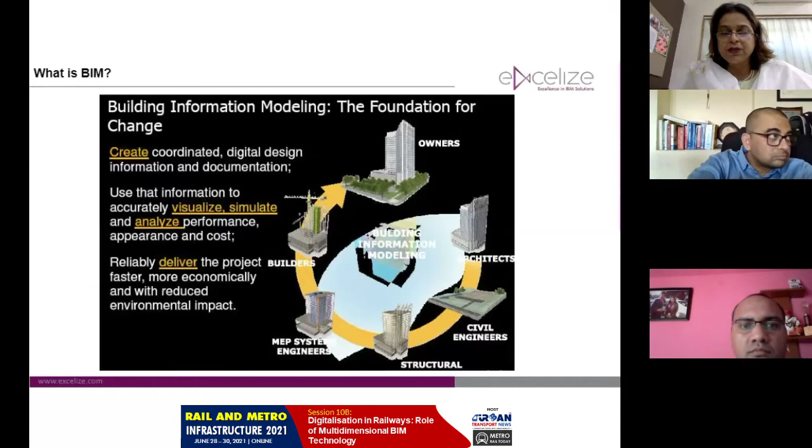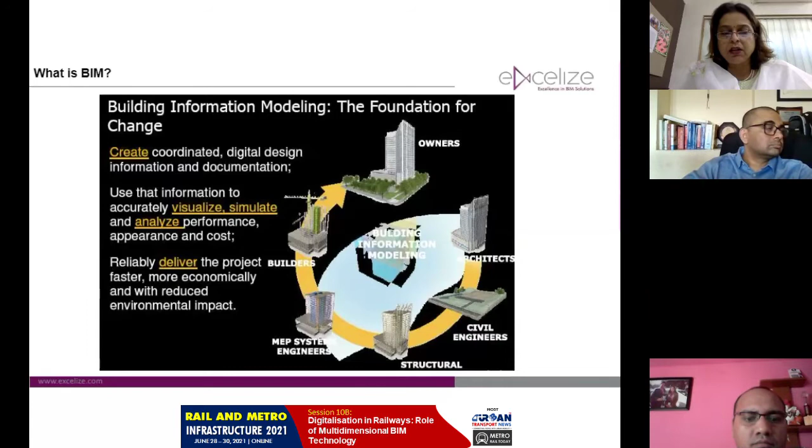So essentially, what is BIM? BIM is not a tool. It's actually a process. It's a process that lets us build virtually before we can build physically. It's a process where all of the consultants and the contractors are all looking at one single source of truth. And this lets us visualize better, it lets us analyze what we are going to build and just have a better product when we actually have the physical structure built.

There are different dimensions in BIM, starting with 2D up to 8D. Very briefly, I'm going to talk about the dimensions of BIM. 3D, everybody's familiar. When we have the height component, we can see a three-dimensional replica of a two-dimensional drawing. The fourth dimension is time. So essentially, when we link our project plan, MSP project plan or a P6 project plan, to our model, we can simulate how the construction is going to happen. And that's essentially the fourth dimension.

Fifth dimension is cost. For every project, every construction activity, there is a cost involved. Being able to connect our ERP systems to the model, to our project plan, and getting real-time information of what money has been spent, what is our cost to completion, all that information is what the fifth dimension of BIM talks about.

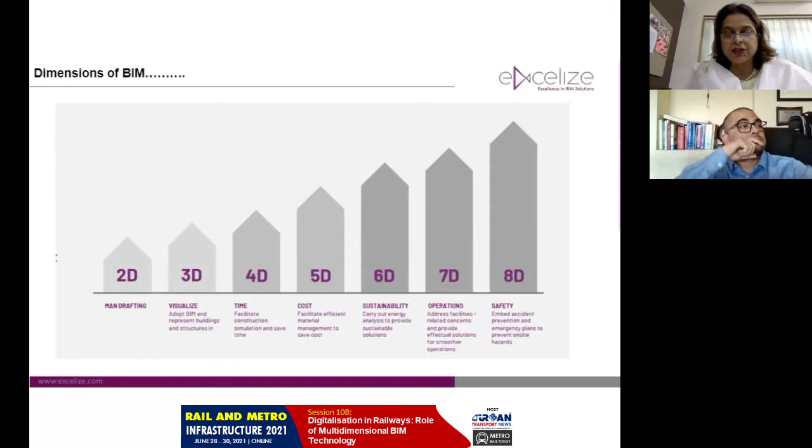Sixth dimension is sustainability. So we can do energy analysis, we can do heat load analysis, do better planning of where we want to keep our openings and structures. That's in terms of the heat. We can also do better calculation of how our carbon footprint is in a building based on the materials that we are choosing.

7D is the operations and maintenance. So actually, if we think about it, construction of any project is a very small part of the entire life cycle. And 7D is where we actually want to focus so we can better manage our buildings and infrastructure when it gets into an operation stage.

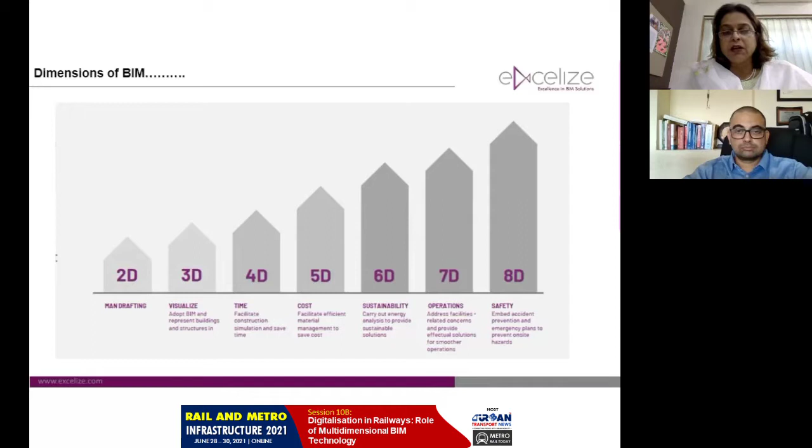The eighth dimension is the safety during construction. How do we ensure there is safety at site? Also, there is logistic planning that we need to do. All those activities become part of the eighth dimension. So like I said, BIM impacts the life cycle of a structure, right from the design to construction to operations.

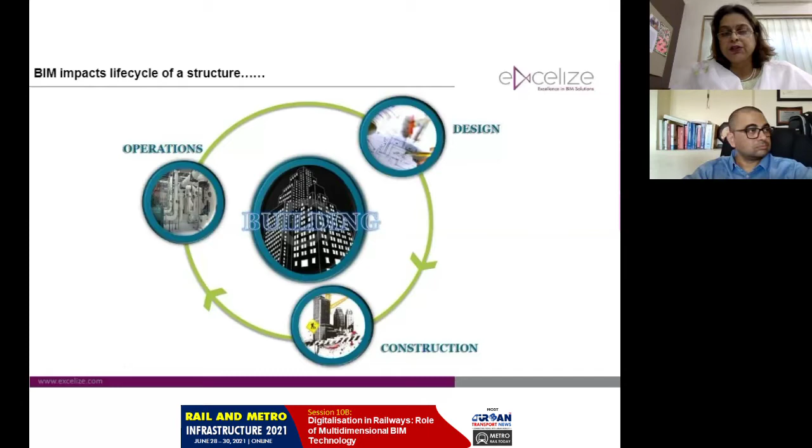If we look at globally what is happening in terms of a BIM mandate, almost all countries have either mandated it or are in process of mandating, where it's government that is mandating it. There are private contractors who are already doing it. So in India also there is a lot of push to have 5D BIM or any kind of BIM implementation on infrastructure projects.

We've been working for the last 5+ years on projects for Maha Metro, Nagpur Metro primarily being one of them, where there is 5D BIM implementation. And very recently, we've started working with Delhi Metro, where the BIM implementation was happening earlier. We have been monitoring the integrated approach to 5D BIM there.

So, what is the use of BIM? It's not just to help us visualize, but it's also, like I mentioned earlier, with the multi-dimensional aspects. You can do your quantity takeoff. You can detect clashes. It can be an excellent marketing tool also. You can extract 2D drawings out of the 3D drawings, so it's not a separate effort that you need just to generate 2D. This all ultimately saves time. And then once we have a 3D model, there are all the mixed reality, virtual reality, augmented reality benefits, which we are seeing a lot of use of in the real estate sector right now.

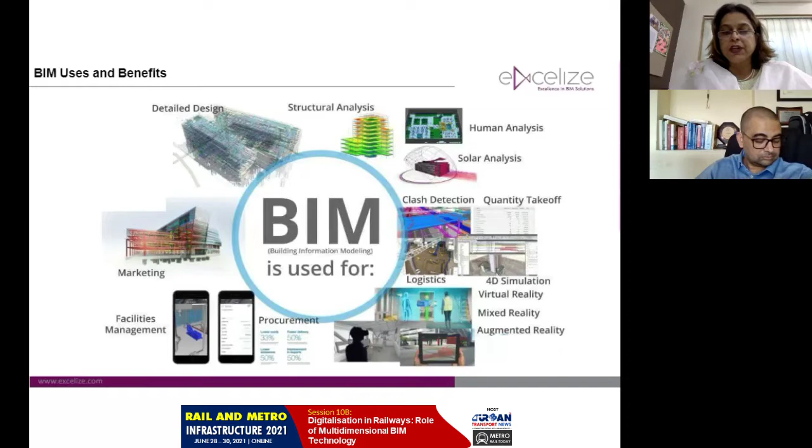So just a couple of examples of how this BIM has been implemented on a few projects from Nagpur Metro and Delhi Metro. These examples are from those two projects. So if we look at what is happening globally in terms of 5D implementation, we know that Crossrail in London has seen implementation right from having a common data environment where all the data is in one location to having an asset information model. So the model is being used for asset maintenance, asset management.

Then there is Sydney Rail expansion, where they have used up to 4D for scheduling logistics. Then there is MRT Malaysia, where it's the model along with the coordination that is being used, and 4D and 5D is proposed currently.

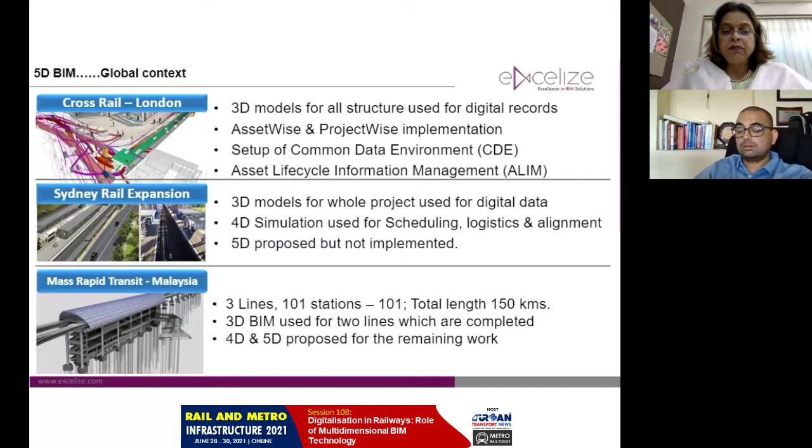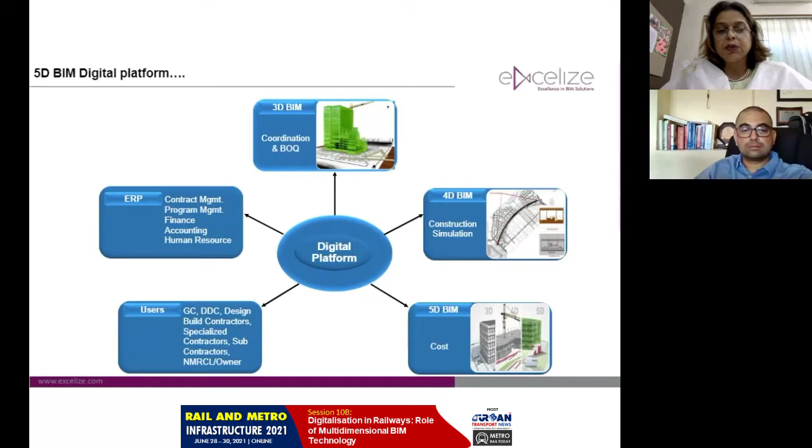What has been done at one of the projects we worked on is we've set up a digital platform where you get all the data from the 3D model. There is the time component from the project plan, cost component. All these are integrated. Besides that, the non-design related activities of contract management, program management, all are also part of this platform. And every user who's part of this construction ecosystem is accessing this platform and using the data out of this platform.

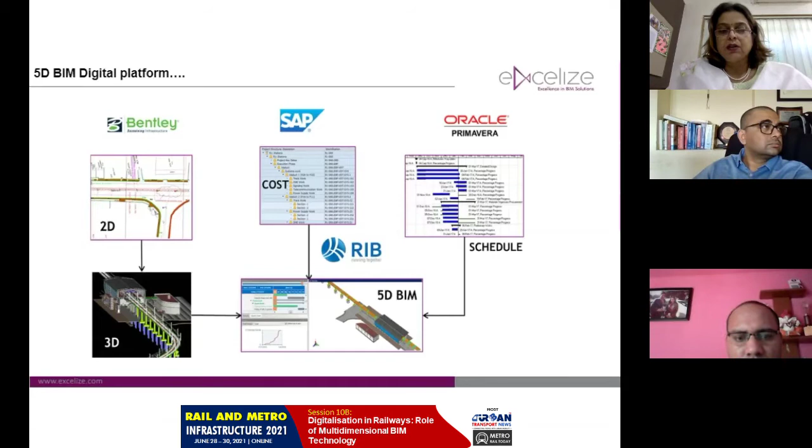So we have 2D models that are being prepared either on a Bentley tool or an Autodesk tool. We have cost data coming from SAP. We have a Primavera schedule, and all of this is integrated into a tool called RIB, where you get a single window dashboard. So here you can track the progress of your project, not just as a 3D visual monitoring, but also as a cost and as a schedule completion.

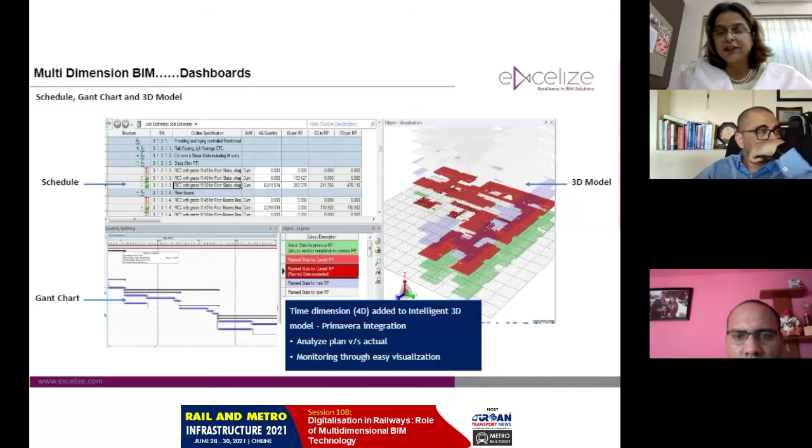Some dashboards that we can typically see on how we can track our progress with having a BIM approach. Here you can see that there is a 3D model, there is a project schedule, and when you link the two together, you can see what is happening in terms of the progress on the project. Is it going as per plan or is it delayed?

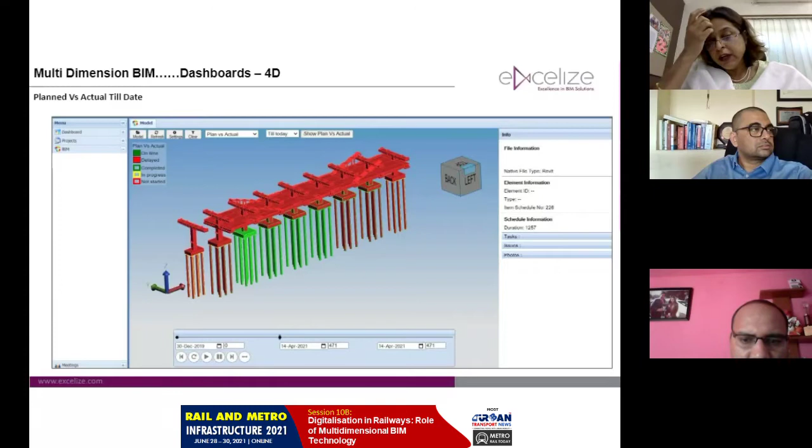So in terms of the 4D, what kind of dashboard can we see? So this is a typical viaduct with the piles and foundation. And here we can see that there is a planned activity against that plan baseline. Visually, we can see things are delayed or sometimes activities are on time. So that was against a baseline what was happening. But if we just wanted to compare for a small section, what happened in month number 2 against planned and actual, we can narrow it down to that granular level, that for just 2 months, I want to know what has happened or what will happen because of the delay that is there, the cascading delay.

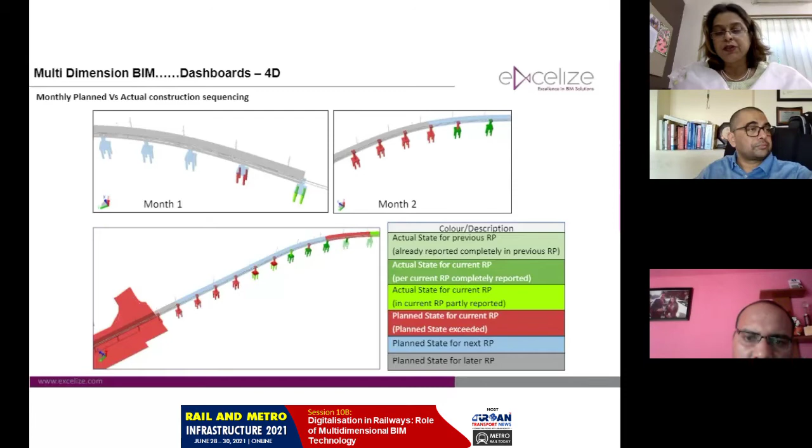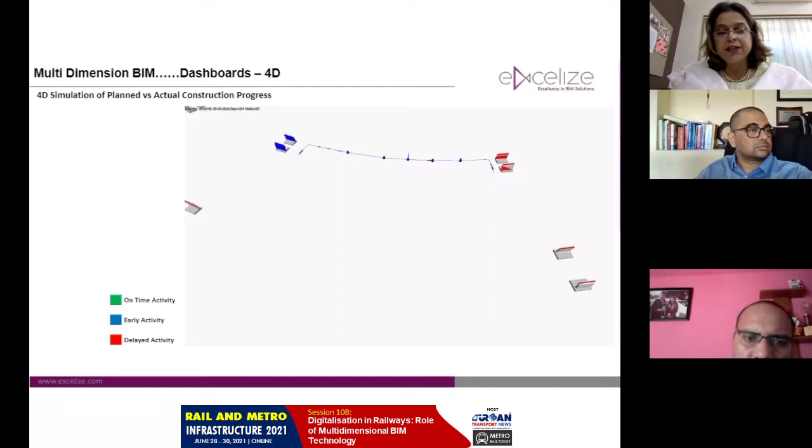This is that walkthrough I wanted to play, but I'm just going to skip that. Essentially, here you can simulate how the construction is happening, and we can generate dashboards similar to this, where we can see what activity is delayed, what is on time, what is early, and at a micro level, in terms of how many piles are done or how many pipes have been installed, we can track the percentage that this was planned and so much is complete. So it gives us an idea of how much material is also getting used as we start construction.

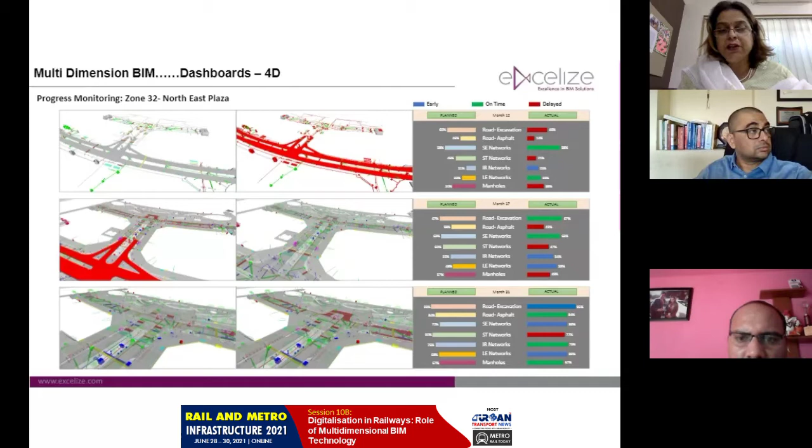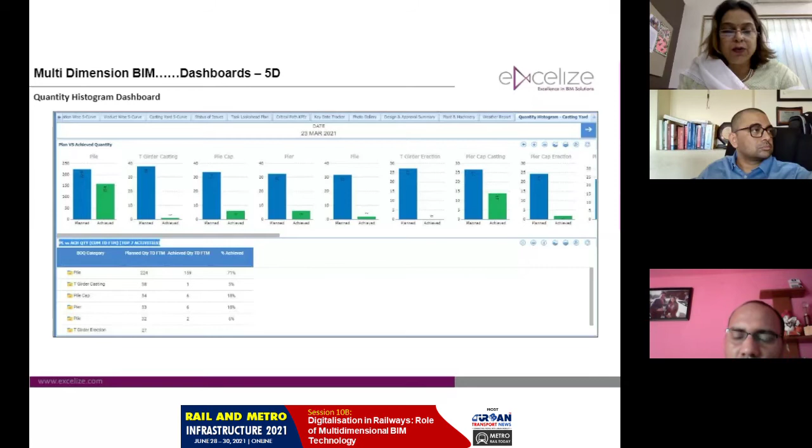The next dimension I want to talk about is 5D, the fifth dimension, which is the cost. So here we can see that there is a planned cost and an actual cost, or rather the quantity. So for every pile that is there or pile cap, we can track what has been planned and what is actually happening. This gives us an idea at what level we are delayed or on track. So if we have planned for 20 piles, but we only finished 18, that means two more, and which those are and how to catch up, all that kind of planning can be done much more accurately.

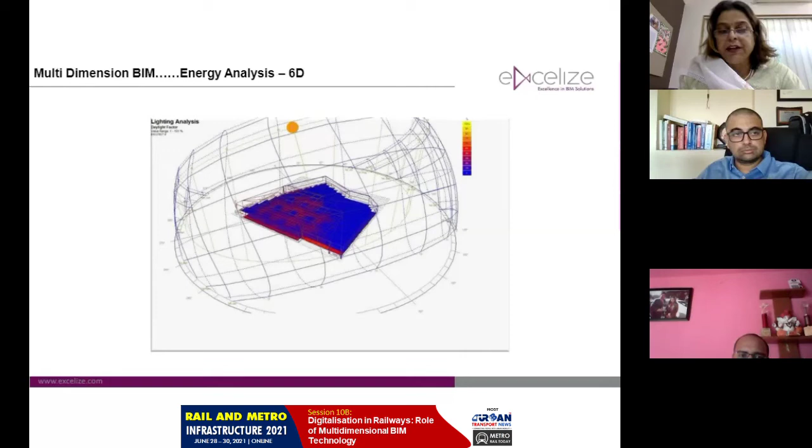So this is what has been done at Nagpur Metro, and the MD himself has been very pro the BIM implementation and the benefits of it, right from setting up a war room to monitor things.

So what are the advantages of having a BIM model? Some of the significant benefits is it is just going to accelerate the project completion. Definitely there's going to be saving, not just in terms of money, but the time that we need. There will be less unbudgeted changes because it's a visual tool. We are already seeing what's happening. And when we get into operations, it's just much better to manage the operations.